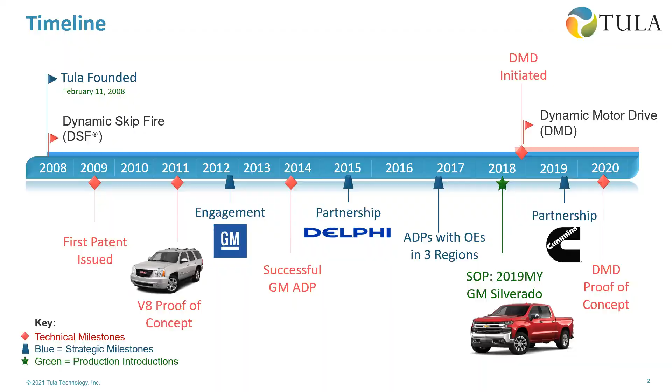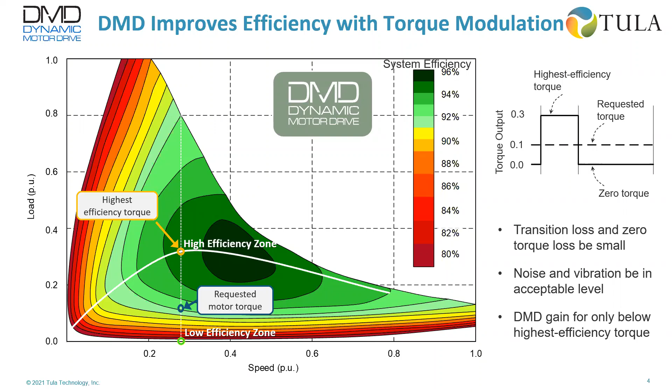And another point to be mentioned is DMD gain is only possible below this high efficiency torque line. And theoretically, DMD can achieve efficiency of this line to any point below that in an ideal scenario. And DMD cannot help for points in this region where the efficiency is still low, but it's above the highest efficiency torque line. So let's expand on this concept by contrasting.

And in contrast, for dynamic motor drive operation, the motor operates intermittently, but only at higher efficiencies. When the torque request is low, the torque and current excitation is pulsed for optimal efficiency. When the torque request is high, the motor operates continuously or conventionally.

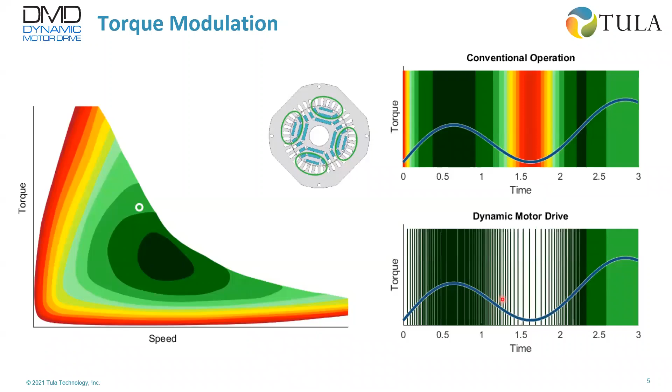So if you compare these two time histories of efficiency, in conventional operation mode, the motor will experience lower efficiency for some lower torque points, but in DMD mode, with pulse torque strategy, the motor maintains higher efficiencies for even those low torque demands.

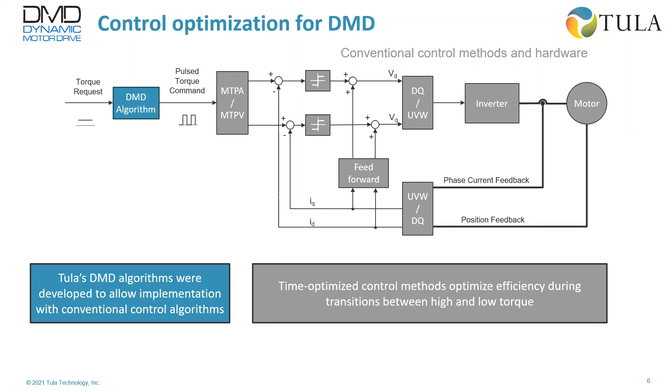So of course, noise, vibration, and DMD gain aspects have to be recorded in this DMD algorithm. So there must be certain scenarios when you have to sacrifice the maximum DMD gain just because the noise level is not acceptable, or vice versa. So such scenarios will be predetermined and incorporated in the DMD algorithm.

So let's look at the vehicle sensitivity and human perception aspect for DMD. So of course, the DMD algorithm has to be optimized such that the torque modulation phenomena remains completely imperceivable by the users. The regimes of operation are determined in a manner similar to that used for production Chevrolet Silverados.

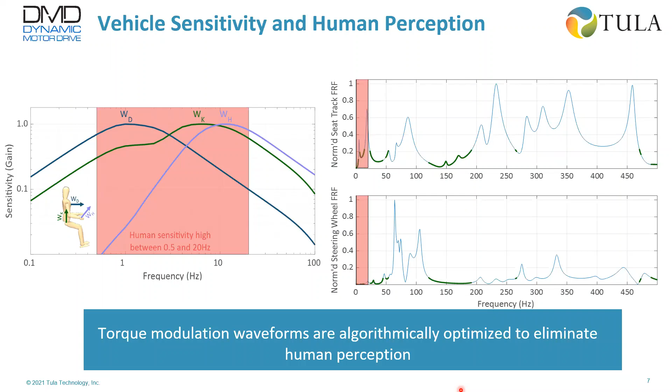So still we see there is a large area for DMD operation between 30 to 45 hertz, and again between 120 to 180 hertz, where perception of vibration will be very small. However, to be mentioned, these are for vehicles with DMD. And as I mentioned, DMD can be applied for other applications where there might be no human being around for most of the time, and these limitations might not even exist in those applications. So DMD can be easily applied even for those.

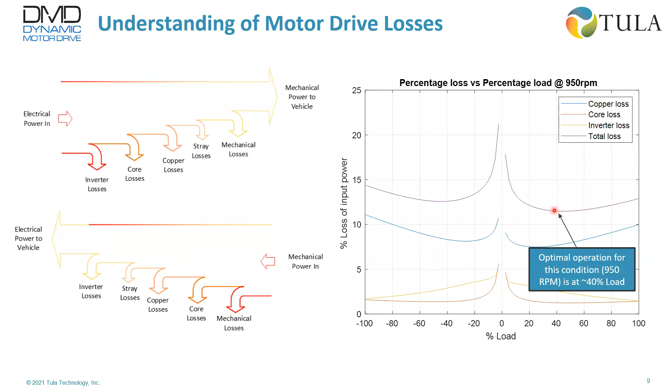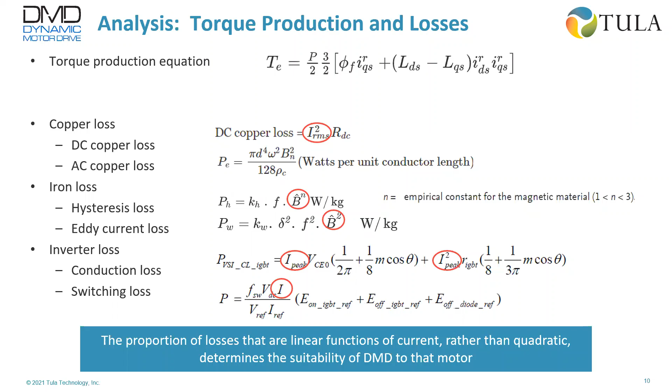So again, the same torque equation. This equation can be applicable for interior permanent magnet motor, surface mounted permanent magnet motor, synchronous reluctance motor type, or so on. So if we look at the synchronous reluctance motor first, for this synchronous reluctance motor, only this portion will remain. The PM torque portion will be vanished. So we can say that for synchronous reluctance motor, torque is proportional to the square of current. And because of that, to get 2 times of torque, we only need 1.414 times of current.

And because of that, from the previous equations we see for different loss components, there are some loss components which are proportional to the square of current. So those loss components will be remaining unchanged for synchronous reluctance motor with 50% duty cycle DMD operation. And there are some losses which are proportional to the current. Those losses for synchronous reluctance motor will be reduced. And for SPM type motor, we see the torque is proportional to the current, and some losses increase and some losses remain unchanged. So this is not suitable for DMD application.

However, for interior permanent magnet type motor, we see the torque is proportional to the current, and also another part is proportional to square of current. So because of that, we see some losses either will increase or remain the same, and some losses will either decrease or remain the same. And this is again showing for IPM and SynRM type motor, which losses are decreasing or increasing or remaining unchanged.

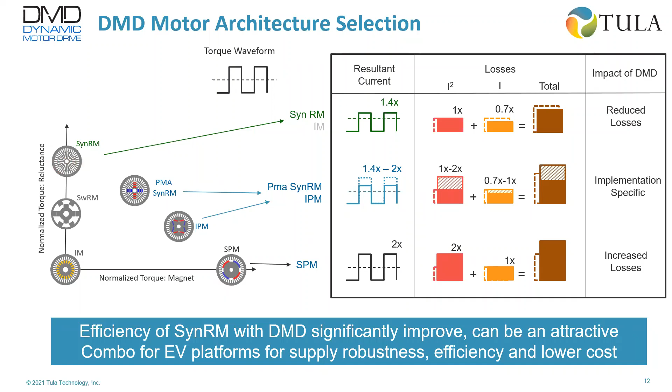So let's look at the DMD implementation and the steps that we followed for DMD implementation. The first step for proof of concept is the design and analysis step, where we evaluated the motor losses with DMD operation. To do that, we have used the FEA tool JMAG Designer brought to us by PowerSys, and we have developed the motor models, optimized the motor parameters for high efficiency and lower torque pulsation and so on. And we also have evaluated the motors for overall losses with and without DMD for a particular set of operating points, based on the JMAG results.

So based on that, we have selected the final design, made the prototype, followed by the final step, which is Tula's DMD control implementation. During the modeling and loss analysis, we worked very closely with the JMAG team, and kudos to the JMAG team for their relentless support to overcome all the challenges in performing the loss analysis, especially for the special motors we use. Because the nature of this research is novel, we're frequently faced with new and unique challenges.

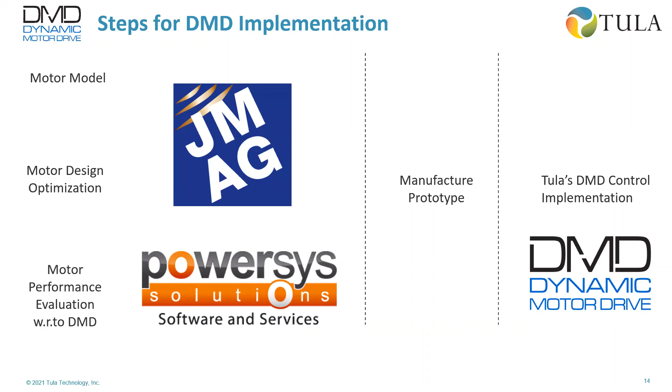JMAG team has always been there to resolve the issues immediately and bring a long-term solution in the next release of their software. So we're really happy to see the evolution of the efficiency map tool, especially in the last few releases, that is really helping us to do our DMD analysis and figure out the best motor from a DMD control perspective.

So again, as a proof of concept, Tula has developed a synchronous reluctance motor that uses a commercially available stator. We have used JMAG Designer to get the optimal synchronous reluctance motor design. We used the multi-objective genetic algorithm programmed in JMAG Designer, and over 2000 designs were evaluated in the finite element analysis process before determining the optimal design.

The optimization process is mostly done following conventional design approaches and objectives, except a couple of additional iterations that were done to figure out the best synchronous reluctance motor design in terms of maximum system efficiency, as well as in terms of DMD gain. So our first proof of concept is an 8 kilowatt synchronous reluctance motor, which has been evaluated and extrapolated to use in a 150 kilowatt traction motor application.

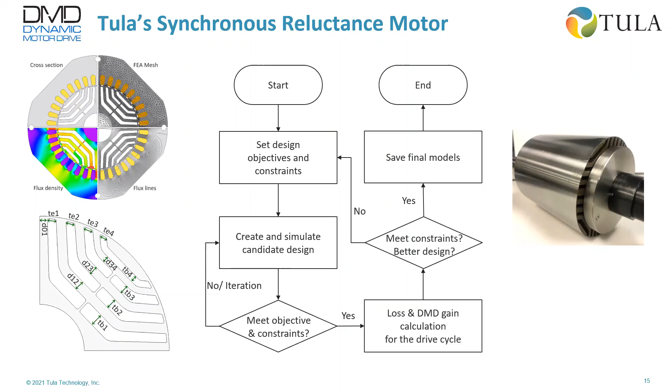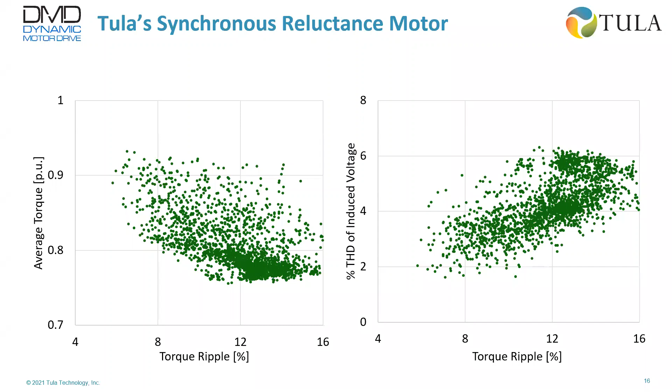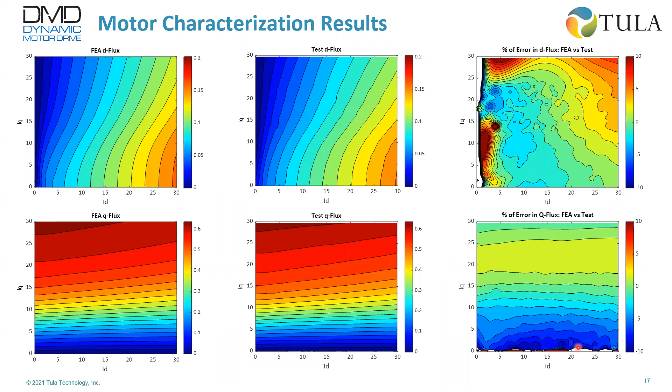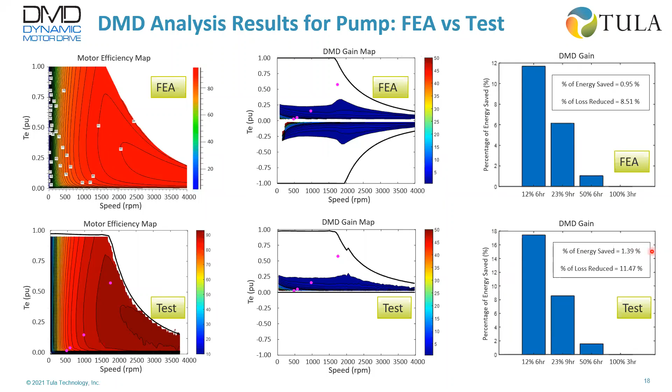And the lower one is showing the test. We see the percentage of energy saved is nearly 1.39%, and the loss reduction possible is around 11.47%. This little increment in the gain is understandable because there are some losses which are a little higher in the actual test scenario, for example core losses, and that can be saved again by DMD. So that's why we are seeing a little higher energy saving in the actual DMD application.

So let's see the gain that is made possible by DMD for the synchronous reluctance motor. Let's see the projected loss reduction made possible with DMD for a vehicle drive cycle.

So over the WLTP cycle, the conventionally operated inverter loss is over 0.08 kilowatt hour of energy. And in contrast, the inverter loss using the DMD strategies is less than 0.03 kilowatt hour. So similarly, we can evaluate the reduction in copper loss.

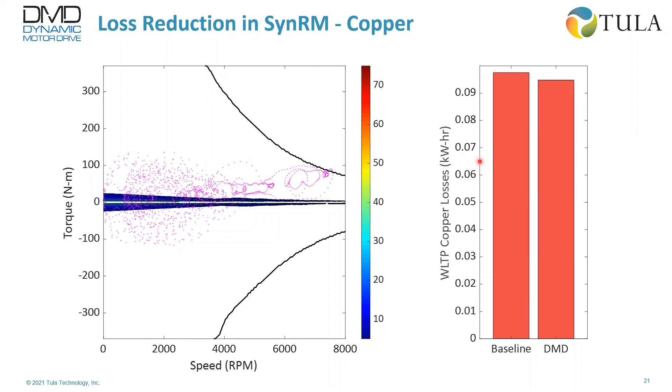However, copper loss increases dramatically with higher current and higher torque, which means the area in which the copper losses are reduced will be small, and that's what we predicted when we saw the torque equation and loss equations before. So the copper loss is supposed to remain almost constant. So that's what we see. There is a very small change in the copper loss.

So the core losses are reduced in a much larger area of operation, sometimes even exceeding 200 Newton meter. Although the core loss reduced substantially, in terms of vehicle losses, core losses are much smaller sources of inefficiency for this particular analysis. So that's why, although it's significant, the total amount was small.

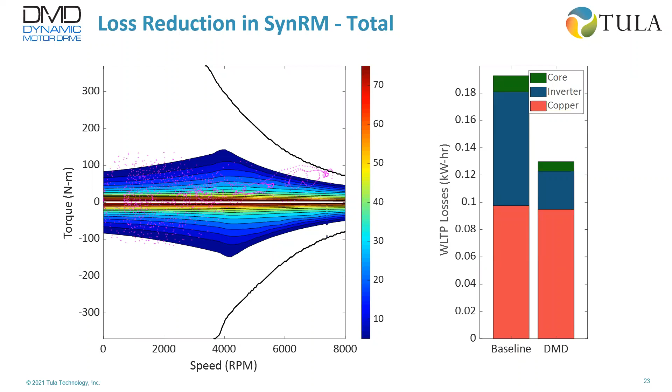But in total, we can see a large reduction in motor losses and system efficiency losses throughout the WLTP cycle. So in total, the powertrain losses are reduced from 0.19 kilowatt hour in the WLTP to around 0.13 kilowatt hour. So projected losses for the synchronous reluctance motor are reduced by approximately 1/3 using the dynamic motor drive technique.

So again, over the WLTP drive cycle, these reductions in losses translate to a gain of over 2.5% with dynamic motor drive, which is impressive considering the fundamental dynamic motor drive technology uses only conventional hardware and only changes in the software algorithm.

So this improvement in efficiency will allow the synchronous reluctance motor to compete with the efficient motors that are currently made possible only with heavy use of rare earth materials. So dynamic motor drive can help eliminate enormous cost and supply chain challenges related to rare earth permanent magnet based motors, so in total it will be offering superior value.

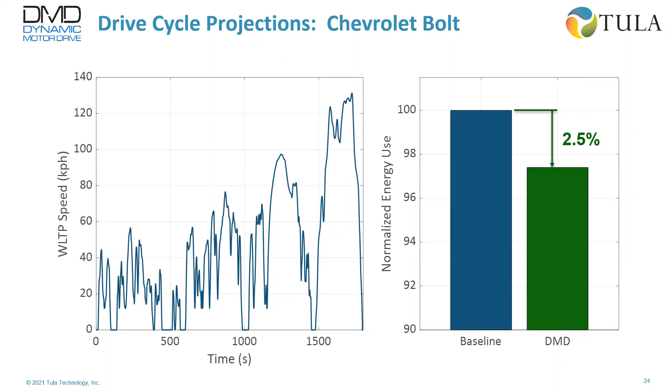So in the end, I will say the proof is in the driving, and Tula Technology is currently retrofitting a Chevrolet Bolt with a synchronous reluctance motor and DMD algorithms to demonstrate the imperceptible and efficient control of the dynamic motor drive technology. It will be available for evaluation to select OEMs and industry partners by the end of the year.

And thanks for taking the time to learn about dynamic motor drive, which is to make the electric vehicle fleet more efficient. So that's the end of my presentation. Let me know if you have any questions regarding DMD. I will be more than happy to answer any question.